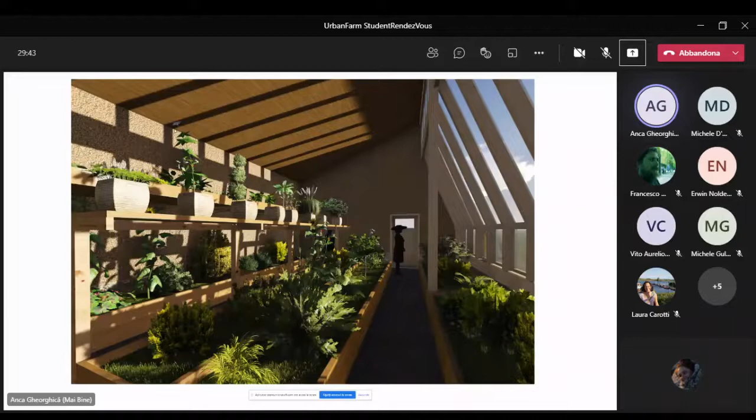We tried, we did some fundraising, we managed to raise funds and initiate the project, but we didn't finalize it. I will tell you right away why. But first, to show you some pictures - we organized tens of workshops with hundreds of participants, and it was a long and demanding process, but we learned a lot and enjoyed it as well.

It was very visible and attracted many visitors and participants. So apart from the greenhouse we tried to build on this land, it was about 1 hectare. We planted several vegetables, and we enjoyed the harvest for about 3 seasons.

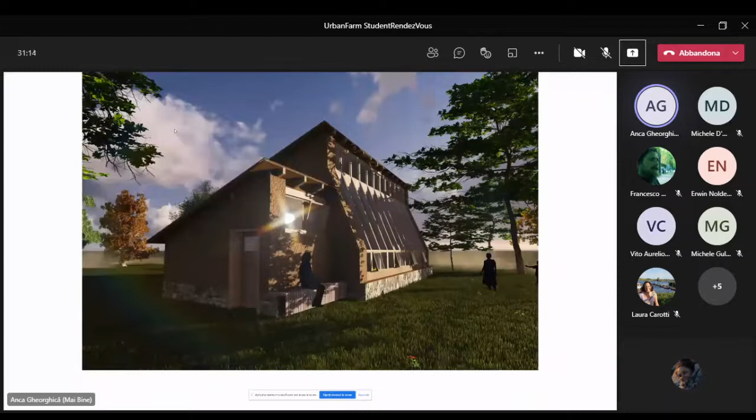And we had to stop it, because of some legal requirements. In Romania, we don't have a law that would allow us to build such a house only from natural materials.

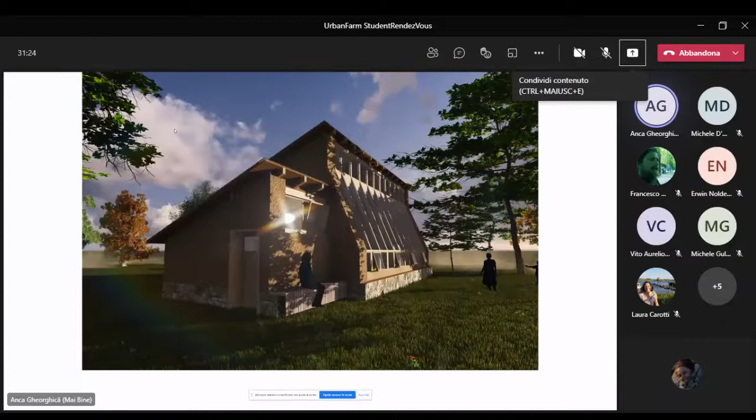I'm not sure if you follow me. The base of the house, the foundation, we did try to do it with this type of materials - you see, stones and cob. And when we tried to raise the walls and receive public authorization, we realized the law wouldn't allow it. No architect would put a stamp on such a construction in Romania, because it's not allowed.

That's simple and annoying at the same time. So we started this in 2017, 2018. We had to bring an end to this project, and for a while we took a break, or we were not involved, only maintaining the other urban garden I showed pictures of before, from the memorial house museum. Only this year, in 2021, this spring, via FoodE, we had a reboost, and we restarted our initiative in this field, again through several dimensions and approaches.

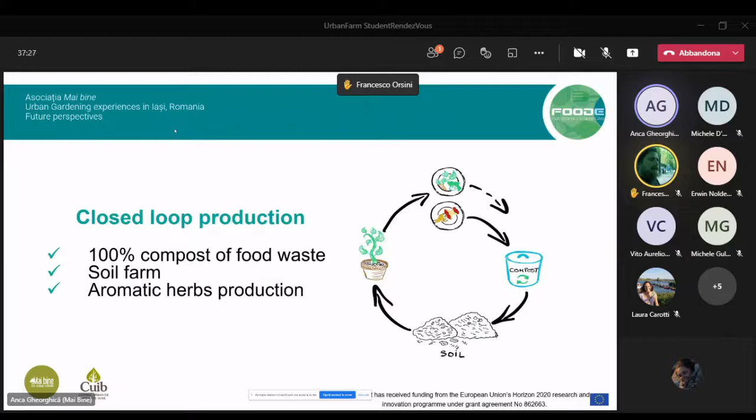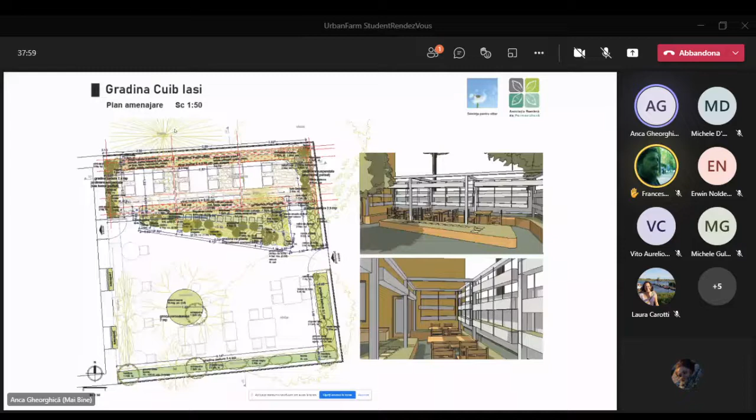I don't know how much you understand from the plan, but we just received this new design plan for our terrace that you saw an image of before, and we'll start in November to work on this new plan. We hope to finish it and launch it in March next year. It will really transform our garden. The terrace is a space of about 50 square meters, not more, but on those 50 square meters we also have about 40 places for customers, so we have to make adequate space for our clients as well. But in this terrace we'll host about 50 edible plants that we'll use in our kitchen. This is our ambition.

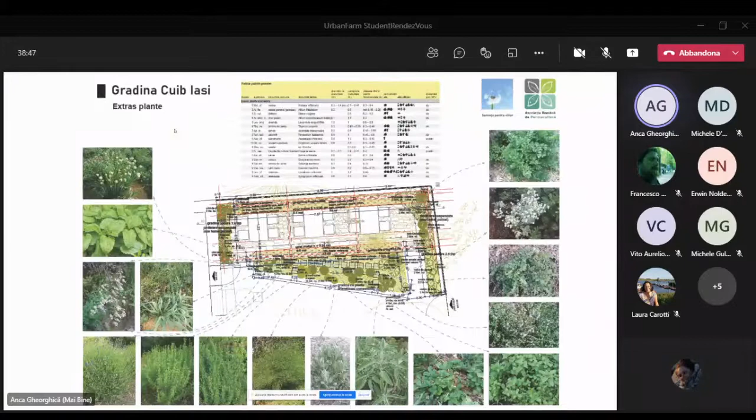So these are my slides. I took some notes, and I will be happy to discuss if there are curiosities on the lessons learned. There are several other messages about our plans for the future, but I don't know if there's time.

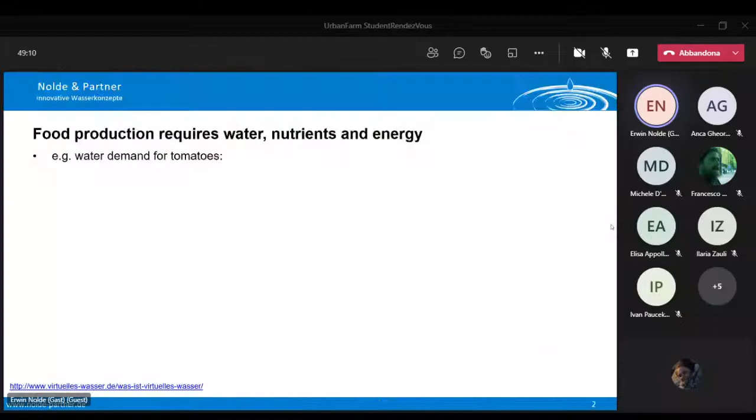First, for the students, I want to explain what is behind this, why we are doing this. As we all know, for food production we need water, nutrients, and energy. How much water we especially need depends on where we are and what kind of technology we use.

For example, producing tomatoes—I found in literature we're talking about virtual water. In Spain, where it's very hot, to produce 1 kilogram of tomatoes they need at least about 48 liters per kilogram. The Netherlands has very advanced water-saving technology, so they only need 2 liters. In Germany, it's about 9 liters.

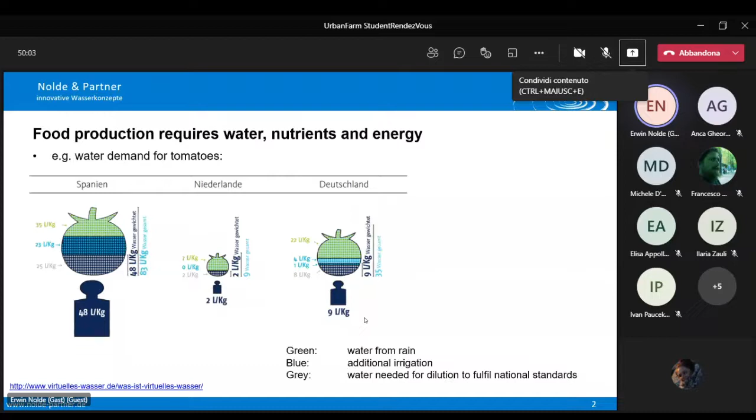Water is one topic, but the other thing is fertilizer. Usually, in wastewater treatment, we need a lot of energy to remove the nitrogen from the wastewater. We need a lot of energy to convert ammonia into nitrate and then back into nitrogen gas released to the air.

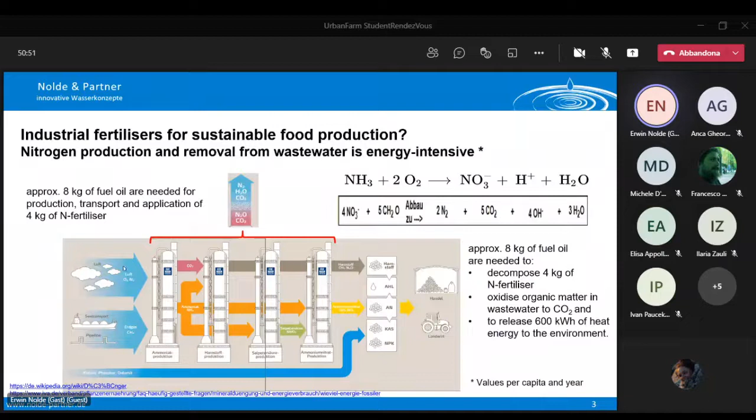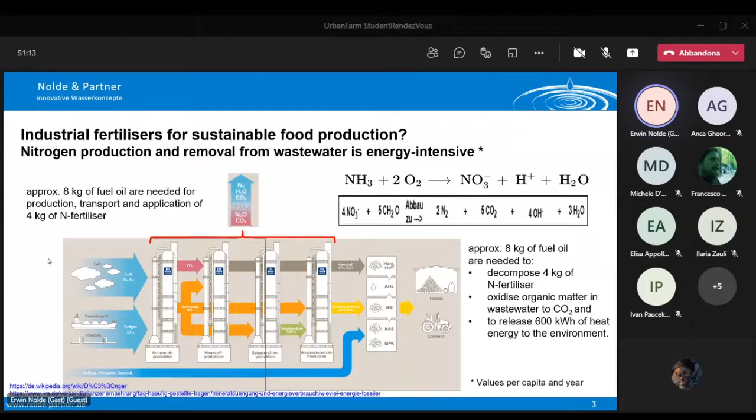The other thing is phosphorus. The phosphorus reserves are limited. Researchers say that peak phosphorus will be in 2030. I'm sure you know, but not everybody knows, that phosphorus is a limited resource, and no life on Earth is possible if we don't have more phosphorus.

Usually we take up phosphorus by eating vegetables or meat, and phosphorus comes out mainly through our human urine. We have to recycle this.

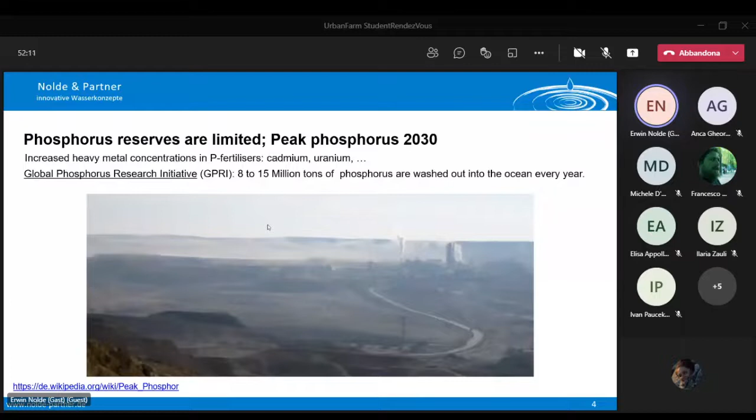At least all these nutrients—phosphorus, nitrogen, and potassium—eventually go to the ocean, and from the ocean there is no way to get them back for use. So I think it's maybe too much to go into all the details.

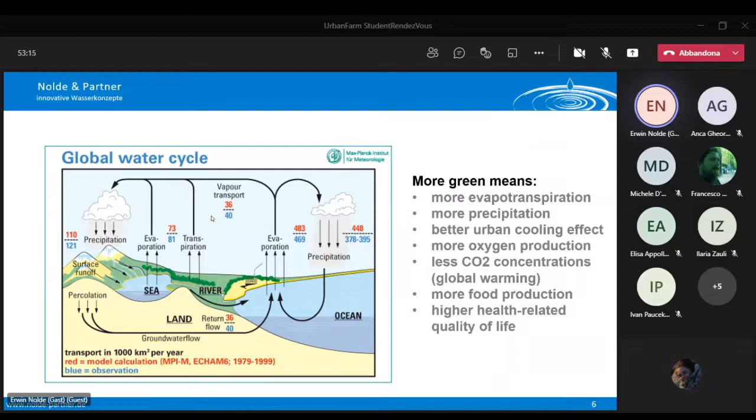It is very important for the water cycle that we have a lot of green in the city, in the area, to have high transpiration and a better feeling, to cool the city. We can cool it with plants, with flowers, and so on, but we can also do it with edible plants.

I think our colleagues in Andernach have permaculture. They showed us how we can do this.

Yeah, the conventional wastewater management—from the view of the permaculture farmers, I think if you're looking at the sewer, it is a rat breeding station. As I told before, the treatment plant, wastewater treatment, and water distribution need a lot of energy. For example, the Berlin Waterworks need as much energy as a city of 300,000 inhabitants uses for household demand. So you can see, on the wastewater side, we don't have safe technology or good technology—it needs a lot of energy and doesn't produce compost, but everything goes to the environment.

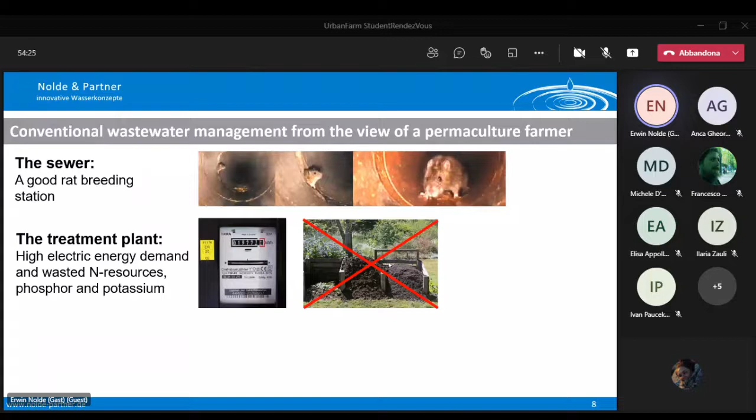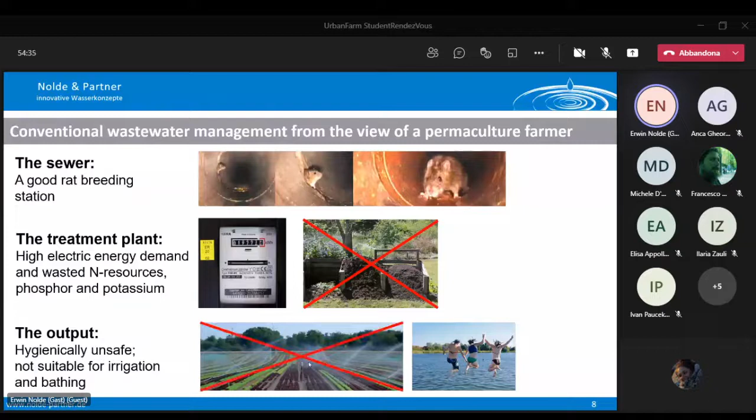Even the water that comes out from the treatment plant cannot be used for irrigation because of hygienic aspects. The water that comes out from the municipal wastewater treatment plant—it's not even allowed to swim in.

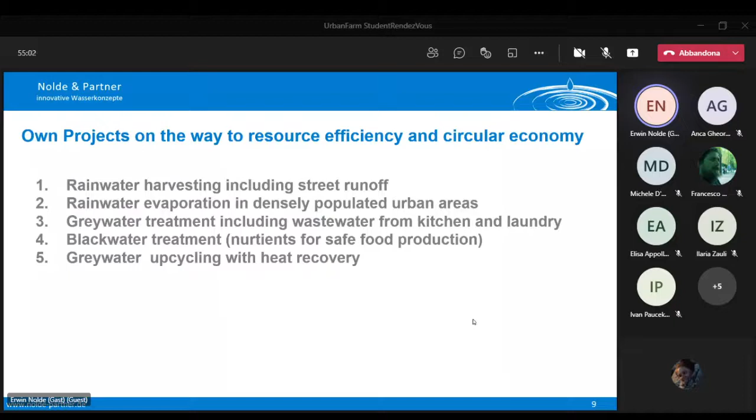So a lot of problems, and so we are dealing with rainwater harvesting, rainwater evapotranspiration to cool the areas, and our main topic is grey water treatment, including wastewater from kitchen and laundry, black water treatment, to reuse the nutrients for safe food production, and also grey water for heat recovery. So, time is running, I have to go fast to the details.

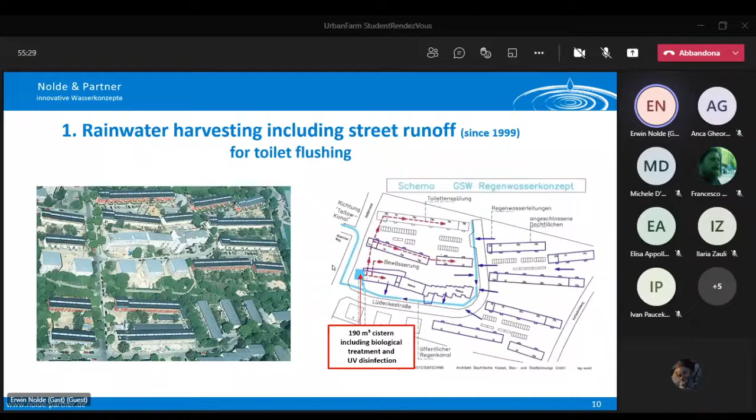We developed things, how we can use the rainwater, take out the rainwater from the sewer, treat the rainwater, and use it for irrigation and toilet flushing in these buildings, using the rainwater which comes from roofs, courtyards, roads, going to a rainwater reservoir, have a biological treatment plant. This is the biological treatment plant. It was in-house, having UV disinfection, and then use the water for irrigation and toilet flushing.

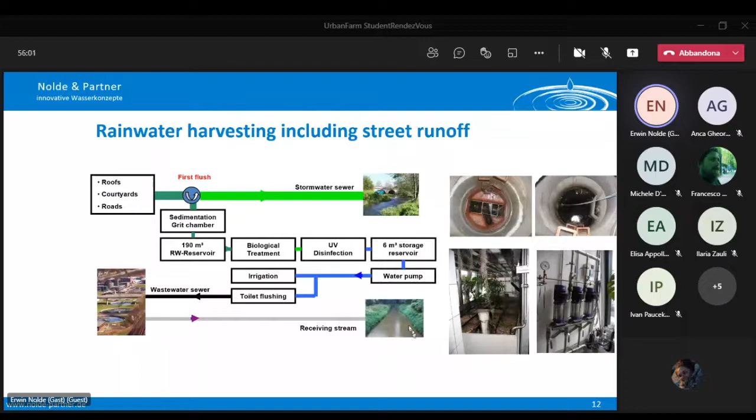So here we can save a lot of water, and this is a good thing for the environment, because not the polluted water goes to the receiving streams, only cleaned water. So the quality of this treated water is very good.

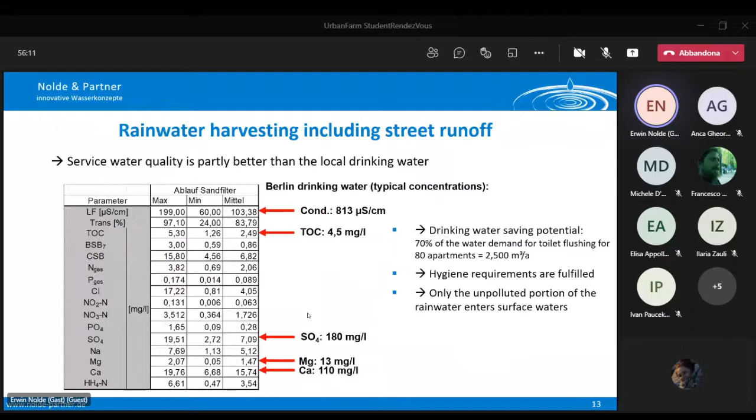All the rain goes into this reed bed, and if you have evapotranspiration by the reed, you can cool the area. You have a better microclimate. And so, as I said, grey water is a resource for water and heat energy, and black water, which comes from toilet, is a resource for energy, for biogas and nutrients.

And I think we should first, like the Circular Economy Act in Germany, which deals with solid waste. That means first thing, we have to avoid waste. Second is we have to reduce it. Then we have to recycle it, and only a little amount should be disposed.

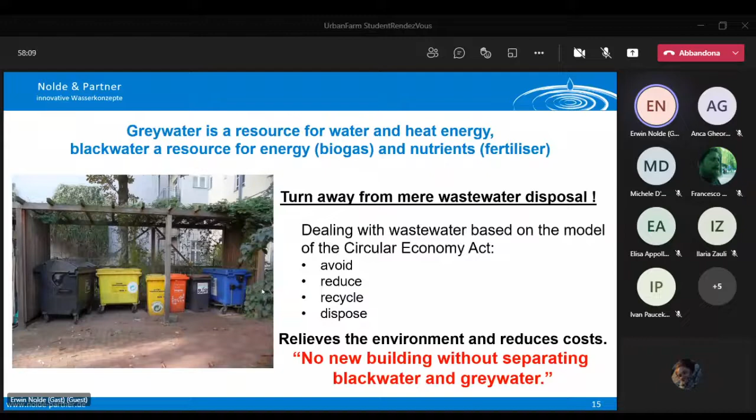So the separation started in the building, and here we can see the resources. In the black water we have a lot of nitrogen and phosphorus and potassium, and grey water has much less concentration of nutrients, but it's a lot of water.

And because the grey water which comes from shower and bathtub has a lot of energy, because this water is warm, in several cases we use this heat which is in the water, we take it out, and we use this for preheating the cold water before it goes to the boiler. So the potential for heat recovery from grey water is much bigger than the potential of earning biogas from the wastewater.

Here you can see the black water. This is sieved. The black water comes from toilet, and from the toilet water in the roof water farm project, we made a liquid fertilizer we called gold water. We use this gold water for food production. Later we can see some pictures.

This is the grey water, the sieved grey water, and after treatment it is very clean. It has no smell, there are no sediments inside, and usually people couldn't see a difference to drinking water. But there is, if you go to the lab, there is a little difference, of course.

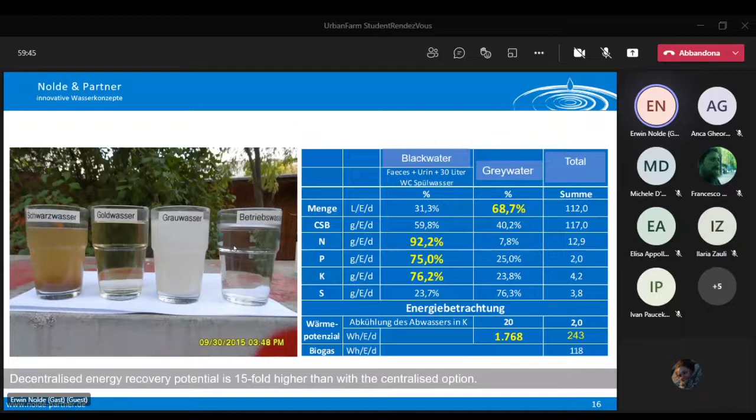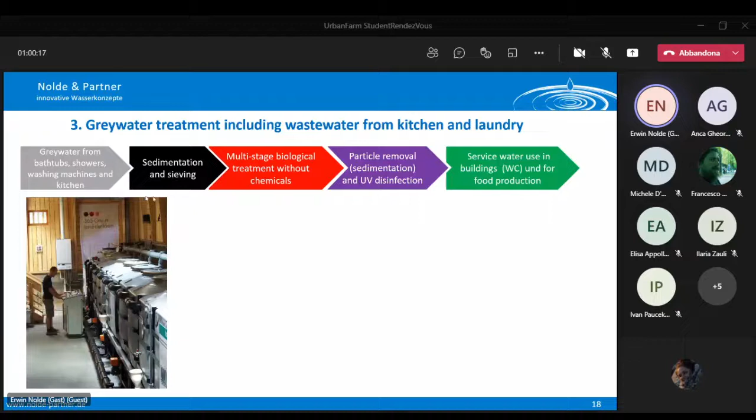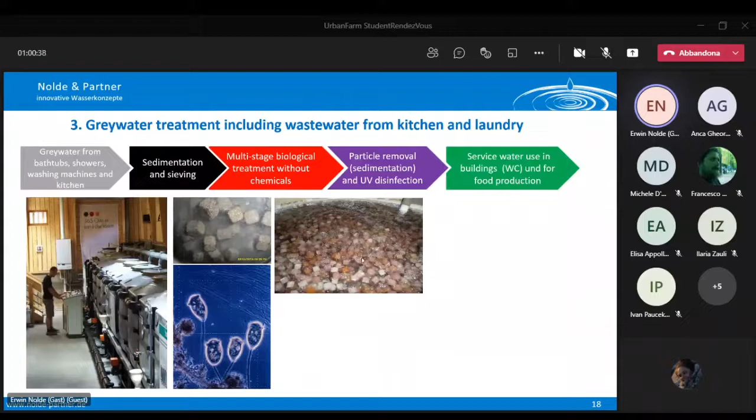But the treatment process is only running biological. We don't add chemicals to the process. The treatment is done by bacteria. The bacteria are mainly sitting on the foam cubes, on the surface of foam cubes or inside the foam cubes. You can see it if we are looking into the basin. And the water which comes out has a very good quality.

In the Roof Water Farm project, we use it for fish farming, and we also use it here for irrigation, as well as the gold water which comes from the toilets, and here from the black water. This was a treatment plant to produce liquid fertilizer from toilet waste, and here you can see the plants.

Our colleagues did big research to see what is the quality of food production if we use recycled water and recycled black water. The result was that there was no difference between the products we produce

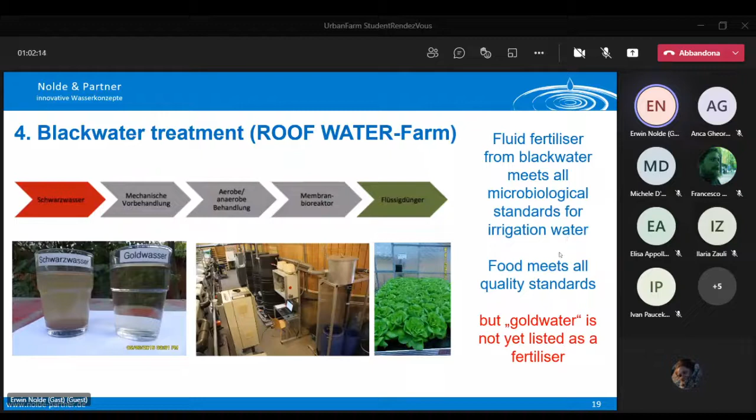and the products you can sell on the marketplace. So even gold water is a safe liquid fertilizer, but at the moment we don't have the permission to sell this, because by our law all fertilizers have to be listed and tested, and the big lobby of fertilizer production is against us, and they don't make it easy for us.

So we are on the way to remove the blackwater treatment plant and build a new greywater plant on the other side. This is planned in the Food E project, and I think the planning is nearly finished. Now we are on the way to realize what we planned.

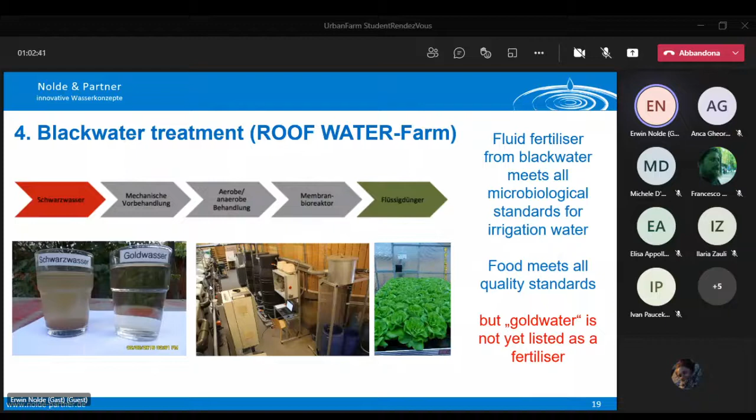As I said before, conventional wastewater treatment is very energy intensive. Now, if we use the grey water from bathtub and shower, which is the normal way, we only need about 1.4 kilowatt hours for the treatment, heat recovery, and water distribution. We put in 1.4 kilowatt hours per cubic meter, and we earn about between 10 and 15 kilowatt hours of heat, which can also be used in the greenhouse.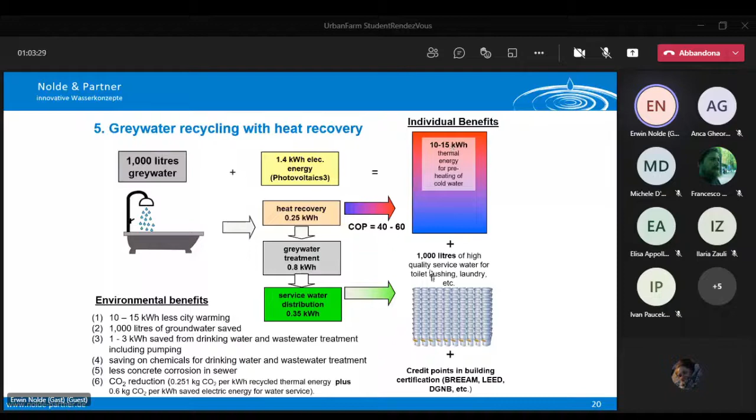And we earn about 1,000 liters of high quality service water. This is what we are always working on.

I think knowing is not enough, we must apply, and willing is not enough, we have to do, and this is in many cases not so easy. So I think I have some more minutes, and I will give you a short show.

I'll show you some pictures about the greenhouse. Can you see it? Yes, okay. This is the greenhouse, which is behind our so-called water house. Here we use a flood desk to produce lettuce and so on. I'll go shortly over it.

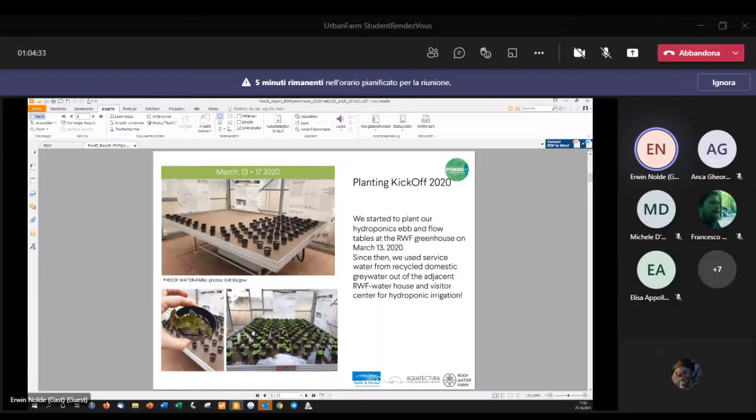This is the beginning. We started in March last year with the small plants. For the greenhouse, my colleague Grit Bürgow is responsible. She is from the Technical University of Berlin, and they are operating the greenhouse.

During Corona times we have had fewer visitors. Usually we have weekly visitors coming from schools and from everywhere. There's a startup from the Technical University, and they produce these vertical beds for food and herb production.